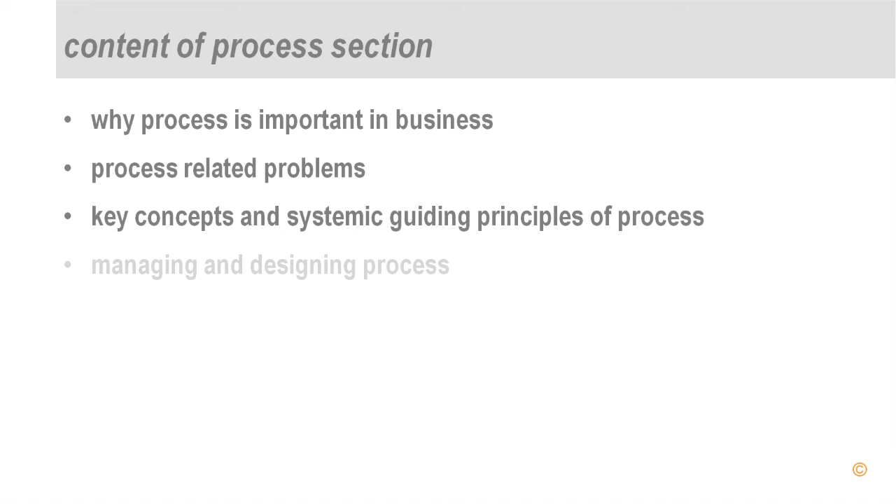In this section, we are looking at process in more detail. The content of the process section is the following: we are going to discuss why process is important in business and what some of the process-related problems are. We provide the key concepts and systemic guiding principles of process, and also how to manage and design process.

Why is process important in business? Global markets are increasingly efficient. To be competitive, organizations need to manage process.

They need to manage efficient process flow in all their activities, especially in their business processes. They need to continuously improve the processing and the output.

They need to develop their integration into the supply chain, in other words, upstream and downstream development, making alliances within the supply chain to increase efficiencies along the whole supply chain.

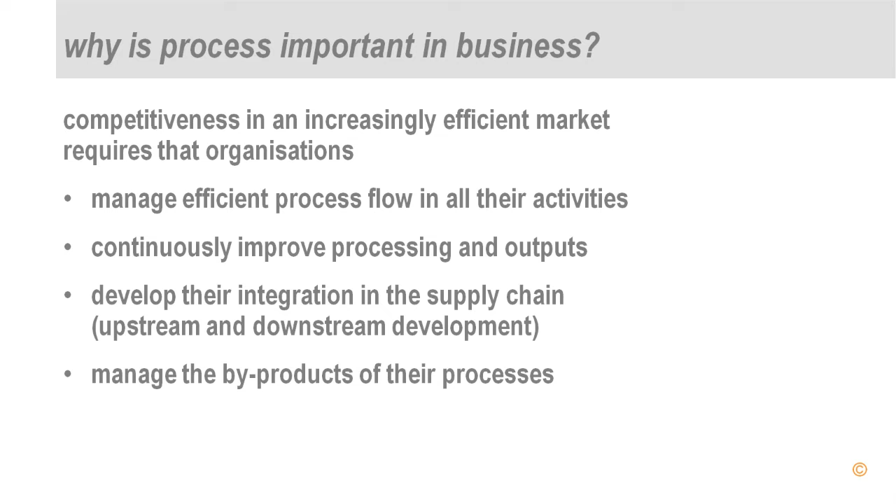They need to manage the byproducts of their processes that is sometimes overlooked, that byproducts like pollutants, for example, become increasingly important.

The impact on the planetary systems will become increasingly important and laid at the door of business.

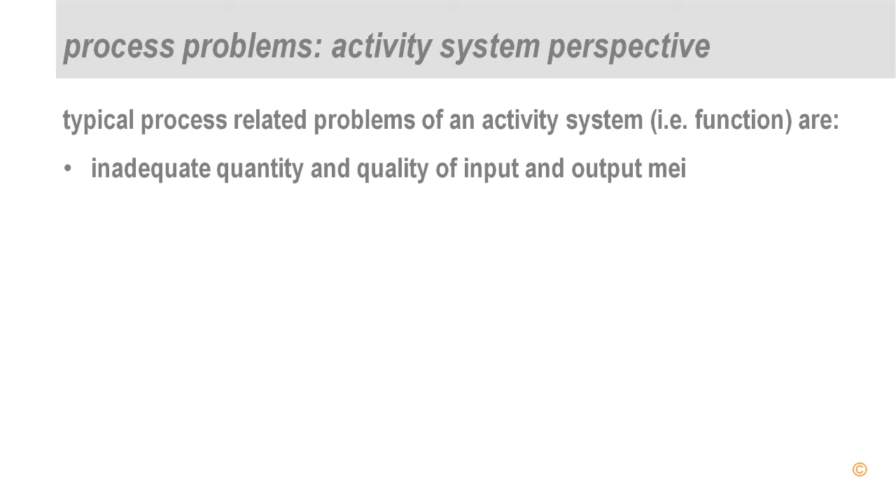Some of the typical process-related problems in an activity system or function are that there is inadequate quantity and quality of input and output, MEI. This could be defective supply and outputs, or over and under supply of outputs and inputs.

Then another problem is inappropriate MEI flow. It could be too fast, too slow, too long, too short distances and so on, causing delays, blockages in processing, deliveries, or over-under supply, or mistakes, faults, waste, amongst others.

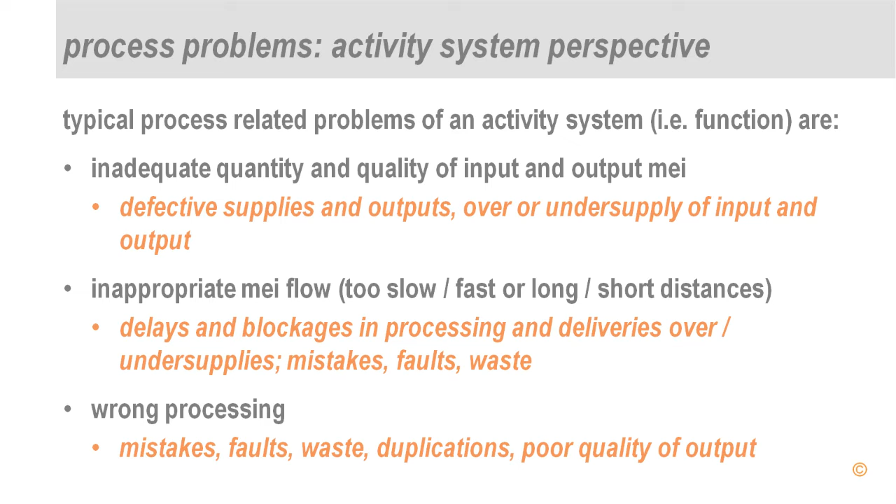And then there could be wrong processing, the wrong choice of processing methodology, or faults in processing, mistakes, duplications, poor quality of output, and the like.

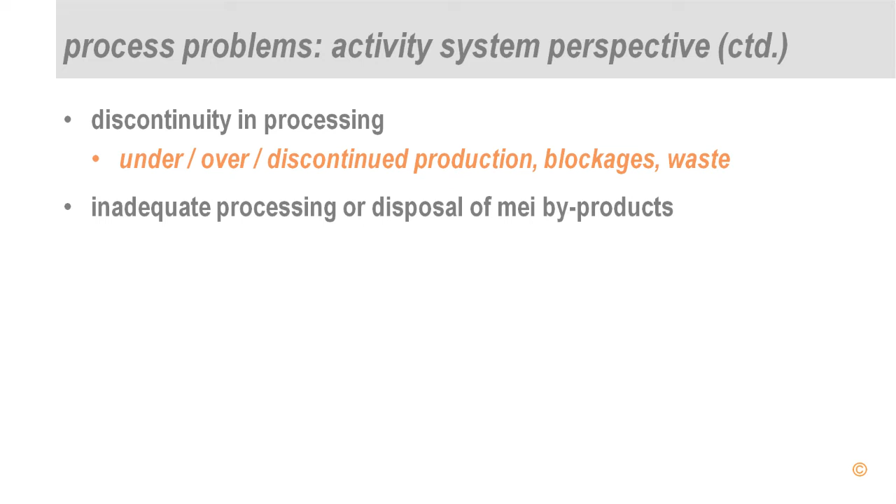Other problems are discontinuities in processing: over, under, discontinued production, blockages, waste, and so on, and inadequate processing and disposal of MEI byproducts. In other words, pollutions, accumulation of toxins, health or safety hazards, amongst others.

The process-related problems within an entity system: first of all, disorganized MEI flow within any of the activity systems of the entity system, which is part of what needs to be considered in any kind of activity system or function redesign.

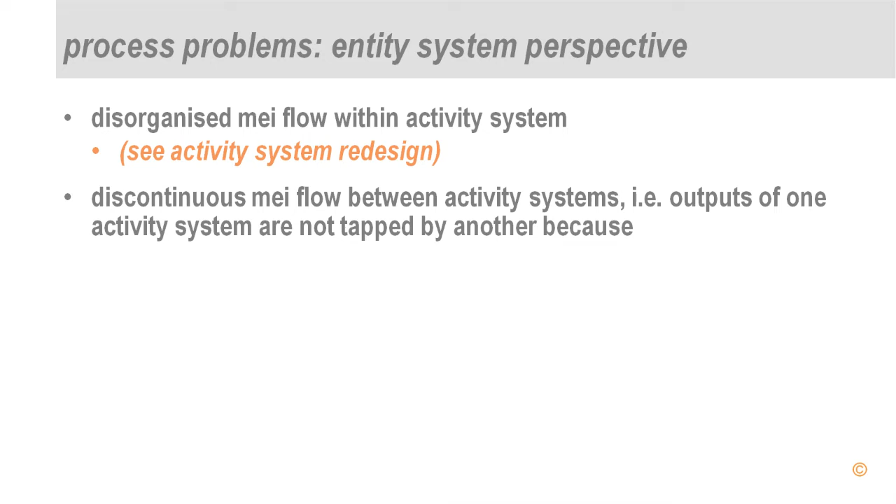Then a process issue is the discontinuous MEI flow between the activity systems of an entity. In other words, the output of one activity system is not tapped by another activity system because the outputs do not meet the requirements.

Or availability is not known, or there are byproducts like pollutants, chaos, confusion, or free radicals in physical systems, which are ignored or not processed and clog up systems within the entity system.

These byproducts are ignored or not processed and clog up systems within the entity system.

And there could be insufficient or faulty MEI flow between the output of an activity system, in that it is not what the other activity system needs, or that MEI is in short supply between different parts of the activity system. So activity systems of the entity compete for the same resources.

That happens very often, that the same labor would be required in different functions of an organization, or that budgets are allocated differently between different activity systems of the entity system.

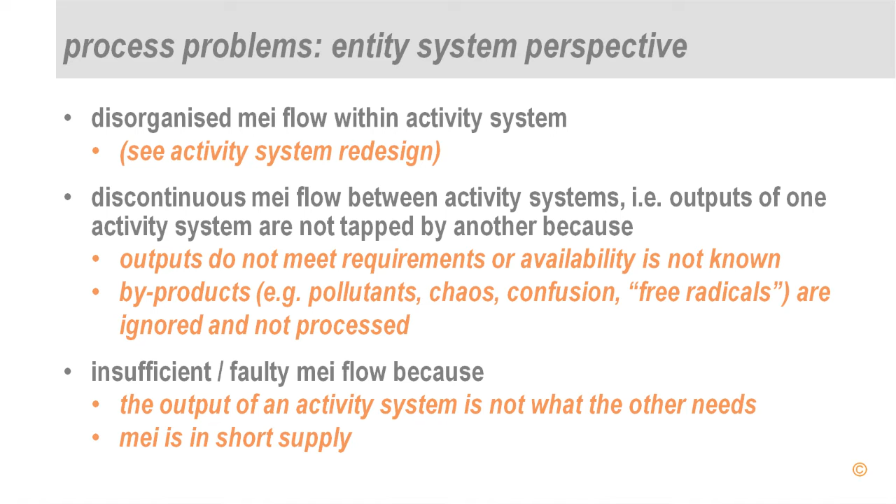And another problem could be that delivery of required MEI is not in time, it's too late or too early, or doesn't happen at all.

This section deals with key concepts and systemic guiding principles of process.

Let us look at the definition of process. A process is defined as a flow of substance in space and time. For example, if we observe a substance like water flowing in a riverbed, we refer to this as process. Or if we observe a substance like different parts being assembled into a car, for example, then we would call this a production process.

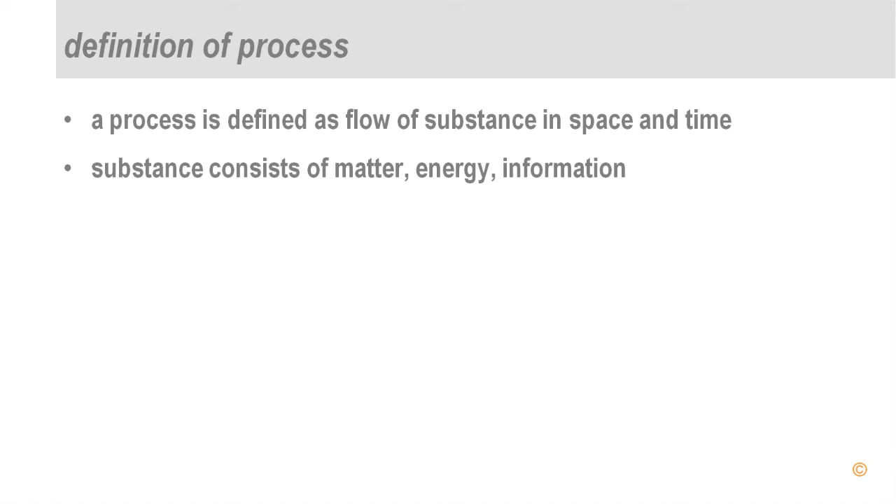Substance is one of the 7 forces of system organization that we will discuss later. We have defined substance as consisting of matter, material things, energy and information. We also say that these matter, energy, information always occur together and form a field of matter, energy, information, and that these MEI fields are what substance is about.

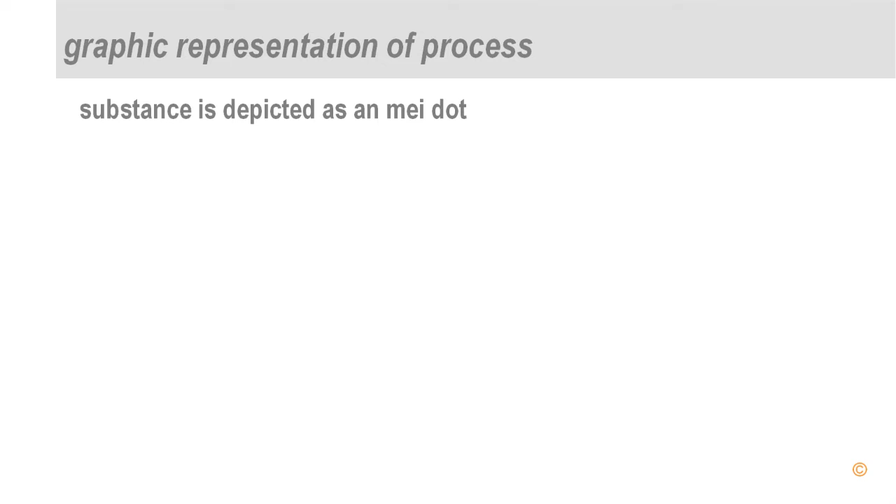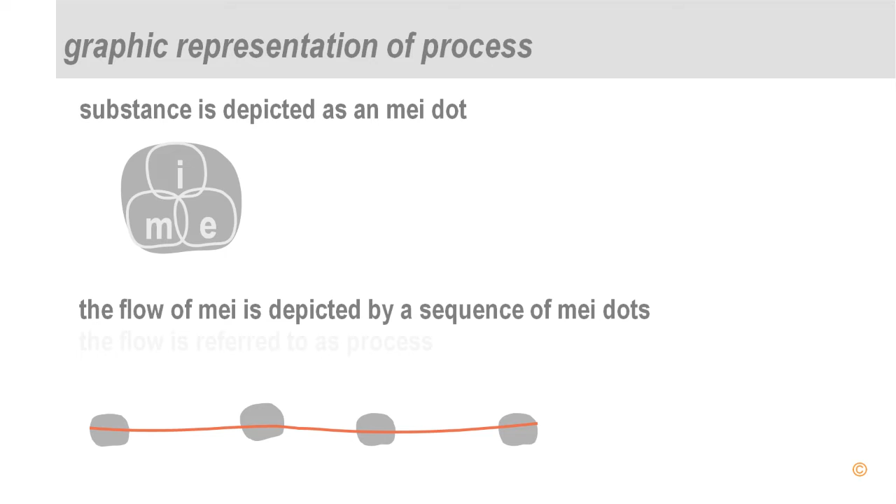The graphic depiction of substance is an MEI dot, a gray shape like that, which consists of matter, energy, information interacting. So as soon as we have a flow of these MEI dots, we have process. Substance flows, and the flow is represented by the orange line, and the flow is what we refer to as process. We need to distinguish between process and process system.

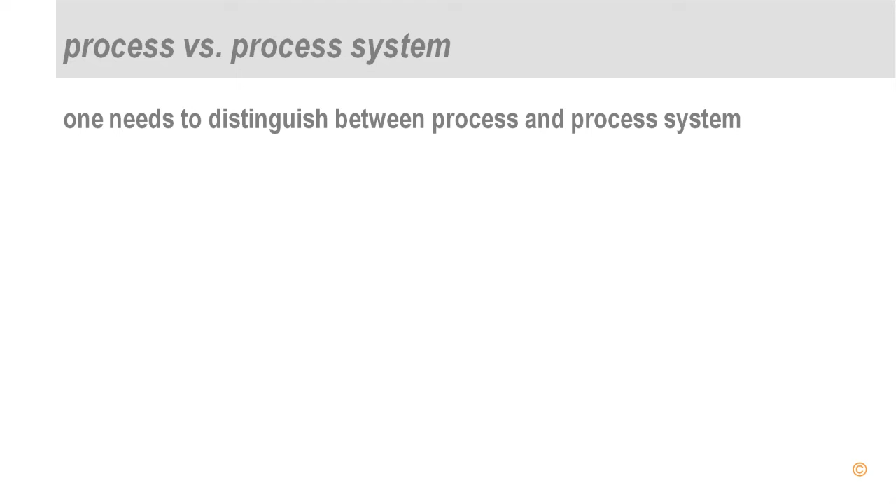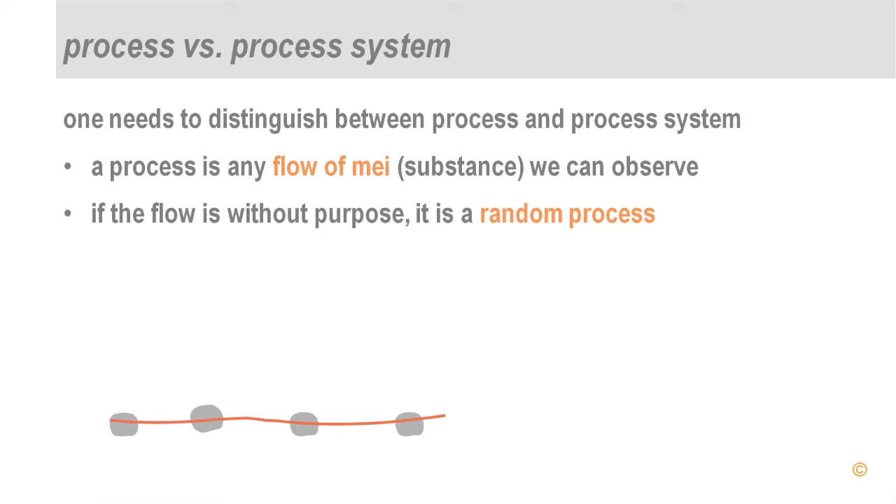If we are talking about a flow of MEI that we can observe, we call it a process. If this process is without a purpose, it is a random process, like a book falling off the table or an accident would be a random process. However, if the process is purposeful, we denote that by the arrows we have discussed in the previous section.

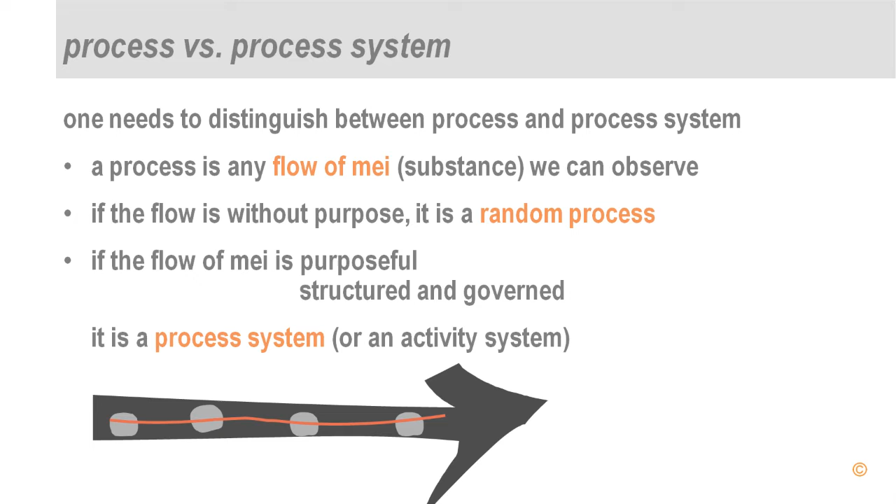And if this flow of MEI is structured and governed, then we have a process system or activity system. In other words, our flow of dots is organized, and that is called an activity system, depicted by an arrow. The arrow depicts organized process. When we hear the word process in management, like for example business process, then we typically refer to a process system or activity system, not a random process. One would use the word random to denote those.

What are some of the systemic guiding principles of process? The first guiding principle is that during processing, the MEI input gets transformed into an MEI output. So for example, if we have a process system like cake baking, the ingredients like butter, sugar, milk, eggs, etc. get transformed into the MEI output, which is our cake.

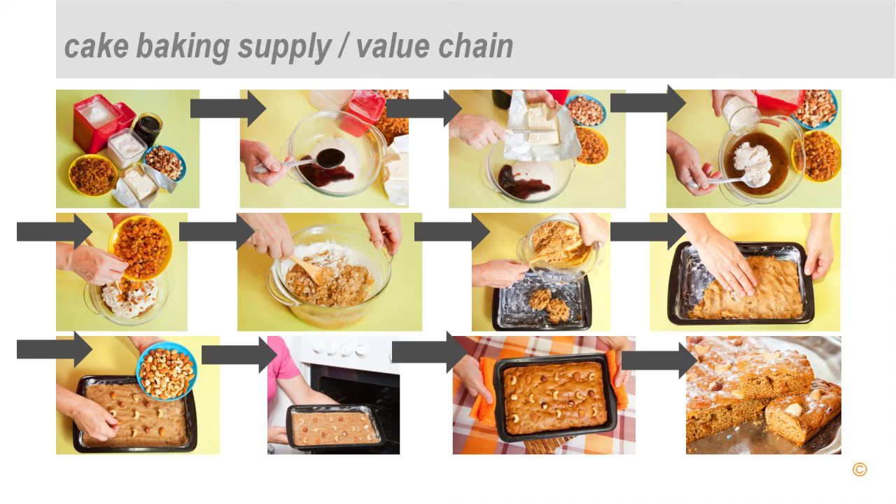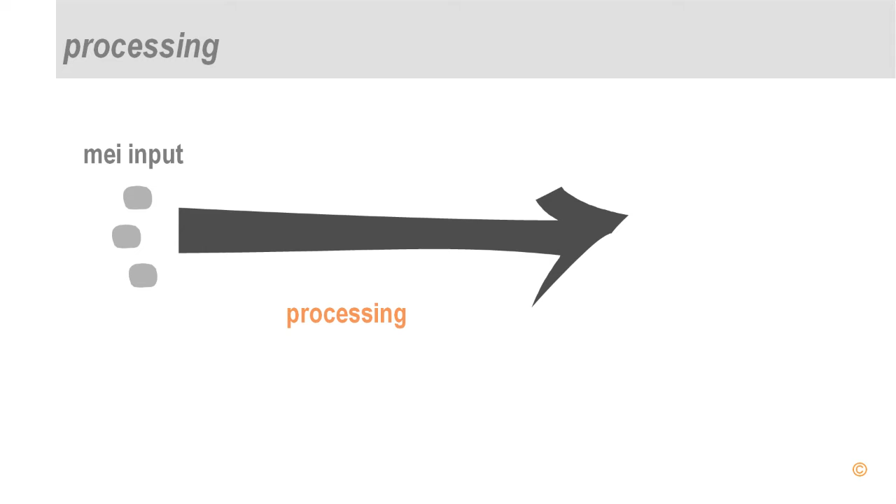So the graphic depiction of the process is we have the MEI dots as an input on the left, and we have the processing taking place in our system from one step to another. So in the cake, it would be we are assembling the ingredients, we are mixing them, we are pouring them into a cake tin, put them in the oven for baking, and so on. And it gives us the MEI output, which is the cake.

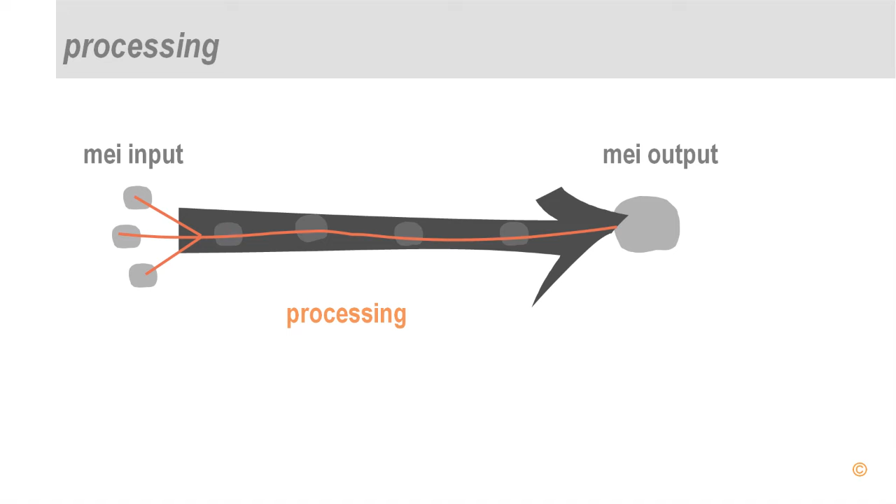The processing MEI, while it is being processed, the dough, the half-finished cake, etc., is also referred to as MEI throughput. The processing or acting on the input substance transforms it and adds value. If we take the example of the cake again, as we take the ingredients and start mixing them, in other words processing them or acting on them, they change their shape, they become smooth, foamy, and have value added that wasn't there before, because as we put the ingredients in, they were separated, and the processing mixes it and creates new value.

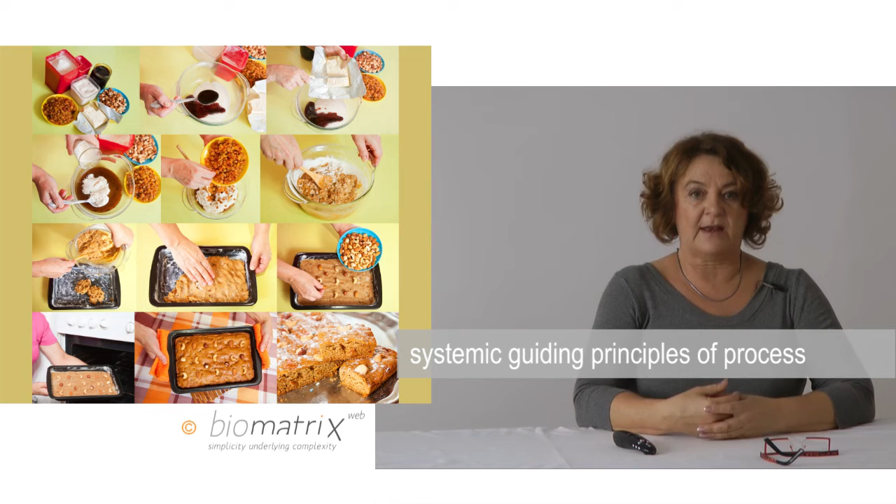As we put the dough into the oven, it acts through heat on the dough and adds value. It transforms the substance, adds value, and we have the cake that we can eat.

The output is greater, more, or different than the sum of its inputs. We have learned before that the essence of system theory is emergence, new quality that arises in the interaction of systems, and we have the same again in the process. We have learned the famous systems saying that the whole is greater, more, or different than the sum of its parts. So in the context of a process, the output, the whole that comes out of the processing line, is more, greater, or different than the sum of the ingredients that we have put into the processing.

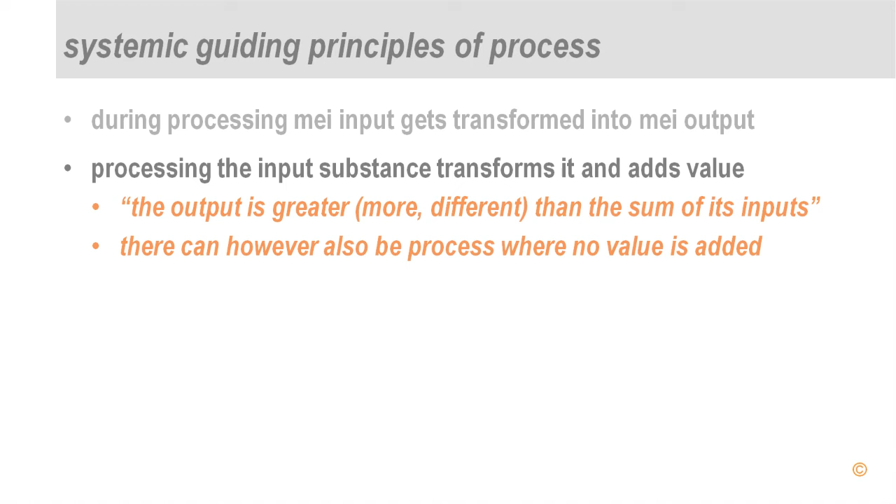We can have, however, also a process where no value is added. Now, in business, when we do business process redesign, one of the issues we are looking at is, does this process add value? If not, we tend to cut it out. So typically pushing a piece of paper from one side to another doesn't really add value most of the time, so it is one of those processes which we find unnecessary and want to cut out.

So business process redesign is really about identifying which processes add value and which don't, and reducing those which don't. Each transformation that happens of matter-energy-information marks a processing phase.

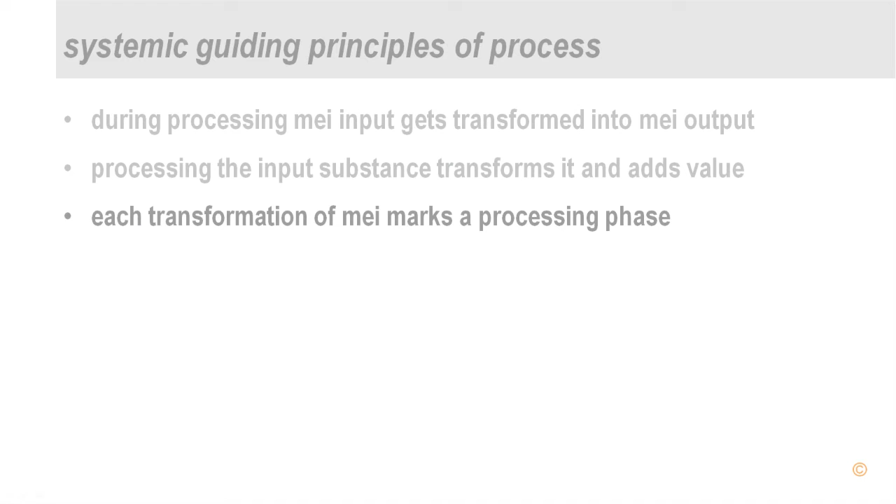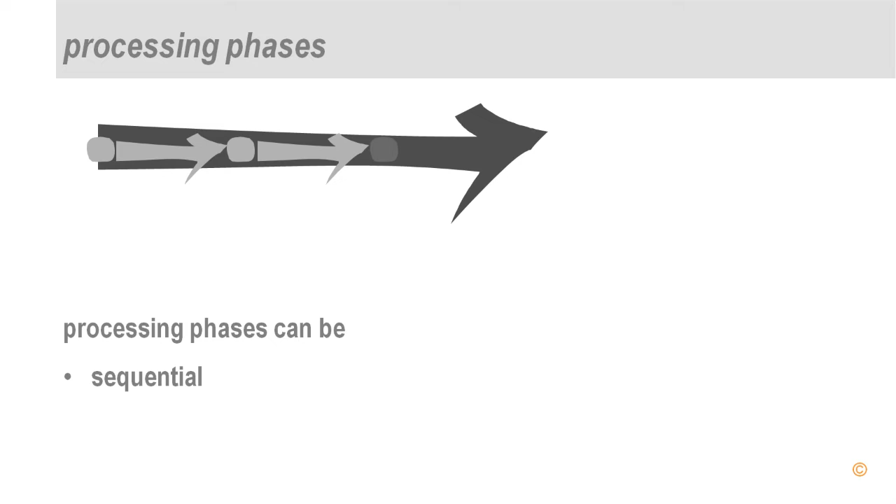So for example, as I assemble the ingredients, I have one phase. As I start mixing them, I have another phase, etc., and the MEI gets transformed in the process of it. This processing can occur in sequential or in parallel phases. Sequential processing occurs one after the other. I first have to unwrap the butter from the butter paper and put it in the pan before I can mix it with the egg, and before I put the egg in, I have to get it out of the eggshell, etc. So there are sequences involved: the assembly of ingredients, the mixing, the pouring, the baking, the glazing. I have to do them one after the other.

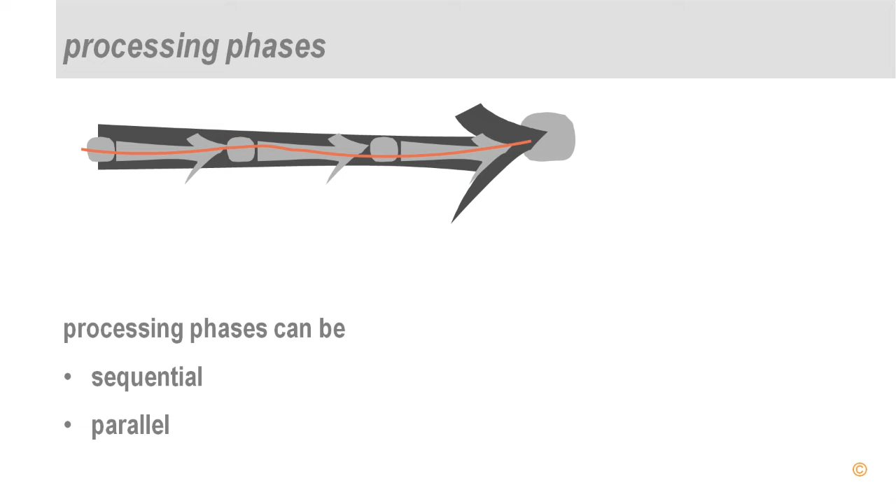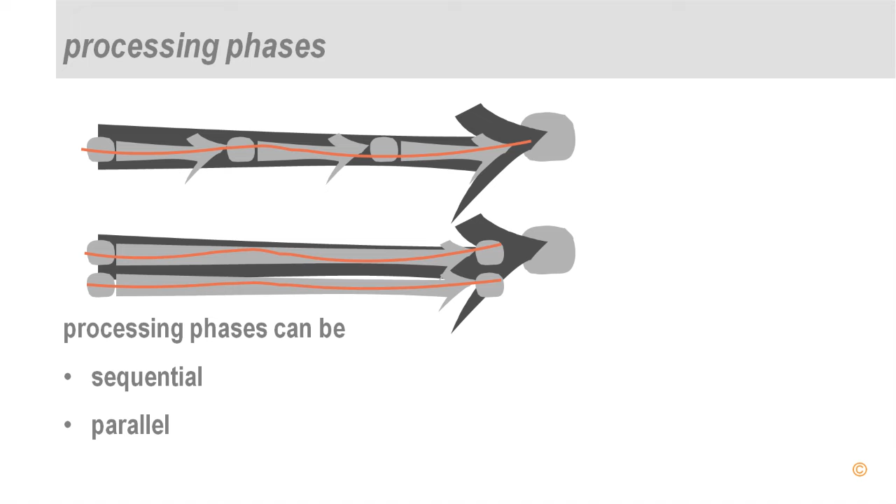This is called sequential. At the same time, we could also have parallel processing going on. For argument's sake, I could preheat the oven while I am mixing the ingredients, so that the temperature is correct when I put the cake in the oven. All process redesign is no more complex than a combination of the parallel and sequential processing phases, except that sometimes there can be very many, creating an apparent complexity with feedback loops, etc.

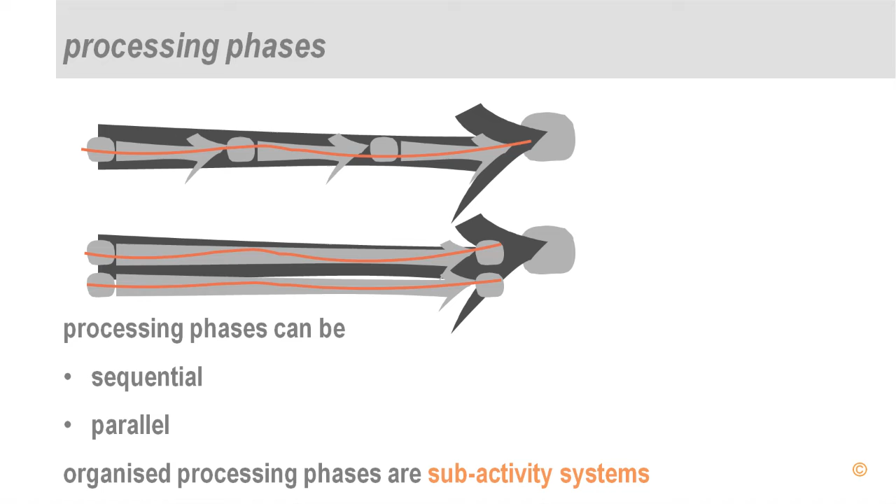In an organizational context, we call the processing phases also sub-activity systems. In other words, if the processing phases are purposeful, structured, and governed to achieve their aim, which is a sub-aim of the overarching aim, then we call them sub-activity systems, and they can be parallel or sequential.

During processing, the MEI flows split up and are recombined into products and byproducts. So if we go back to our cake baking example, the products at each phase would be the assembly of the ingredients as the first dot, the dough of a particular consistency or quality as the second dot, baking it as the third dot, and the final cake as the fourth dot.

At each phase, we also have byproducts being produced. Once I'm assembling my ingredients, part of the ingredients go into the mixing bowl, the other part goes into the rubbish bin. Once I pour the mixing bowl into the baking tray, some of the dough stays behind and will be washed away with the dishwashing. While I'm baking it, some of the byproducts will be that the kitchen is heating up.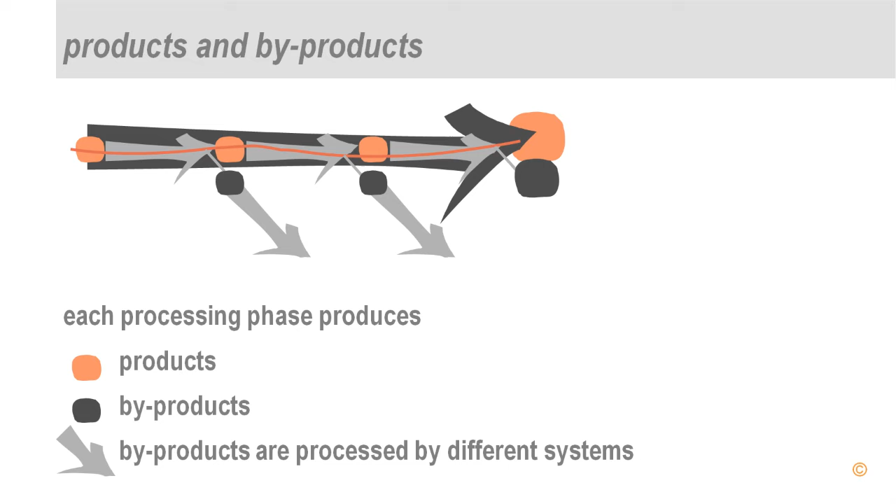So at each phase we do have products and byproducts, and there are different activity systems or process systems that deal with those byproducts. The rubbish goes into the municipal rubbish dump where it is being sorted, composted, etc. The dough in the bowl goes into the sewage system. The heat of the kitchen is radiated into the kitchen.

So there are various activity systems that deal with those, and it will be increasingly important for organizations to manage not only their products but also their byproducts, the impact on the planet.

One of the reasons why we have challenges such as climate change, polluted water, soil, etc., is that we have given our byproducts to the planet, and the absorption capacity of the planet to deal with those has been exceeded. So we need to actively manage those to get planetary systems back into equilibrium, because if we overload their absorption capacity, whole ecological systems can go into disarray, as we observe through climate change.

And increasingly, it will be legally enforced for organizations in future to deal with their byproducts.

Another way of looking at byproducts is how Buckminster Fuller talks about it. He said byproducts are merely resources we haven't tapped yet. We haven't looked at those systems and made them profitable, or linked businesses to them. We have done it with some, making electricity from municipal rubbish dumps, for example. There must be many more such opportunities.

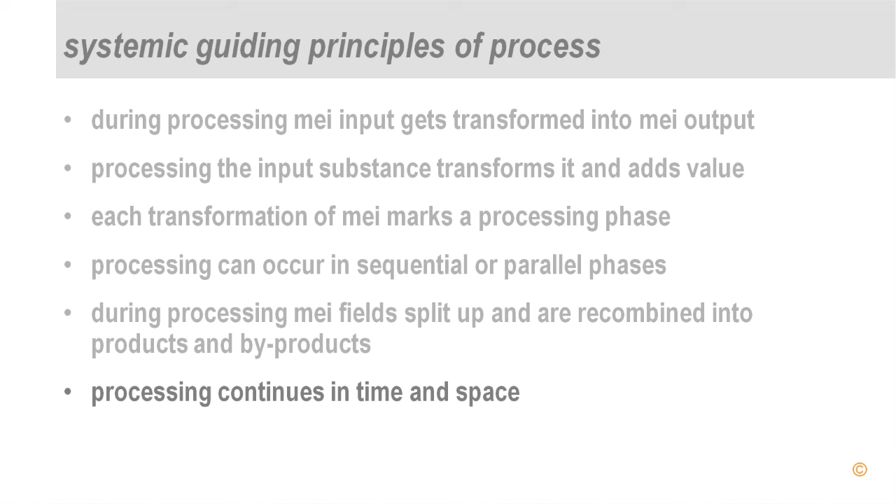Processes continue in time and space. That is another important principle. It is the MEI that continues in time and space, and it continues through tapping of MEI.

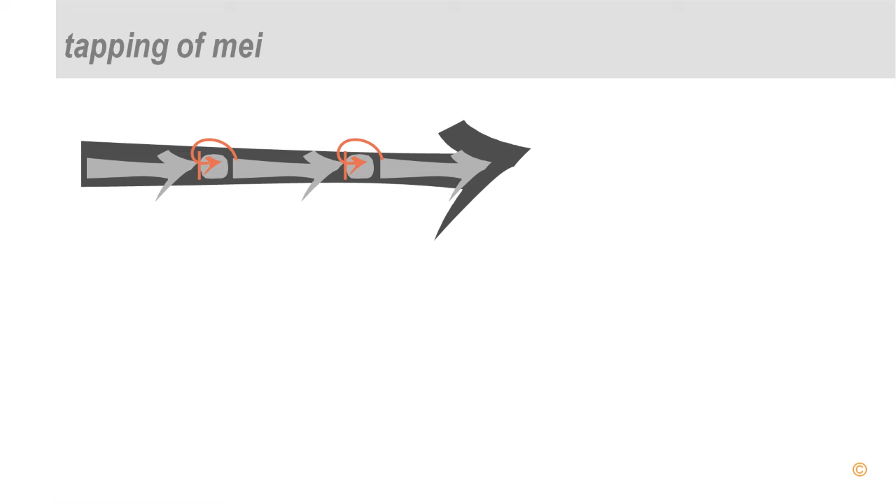If you look at that graphically, we have our process system with different phases. The first phase produces an output, for example, part of a machine, which needs to be tapped by the next phase as input to produce the finished product, a finished machine, which is being tapped by the next phase, which could be a warehouse, and so on. So the output of one phase is tapped as input by the next phase, being transformed in processing, and then again tapped by the next phase.

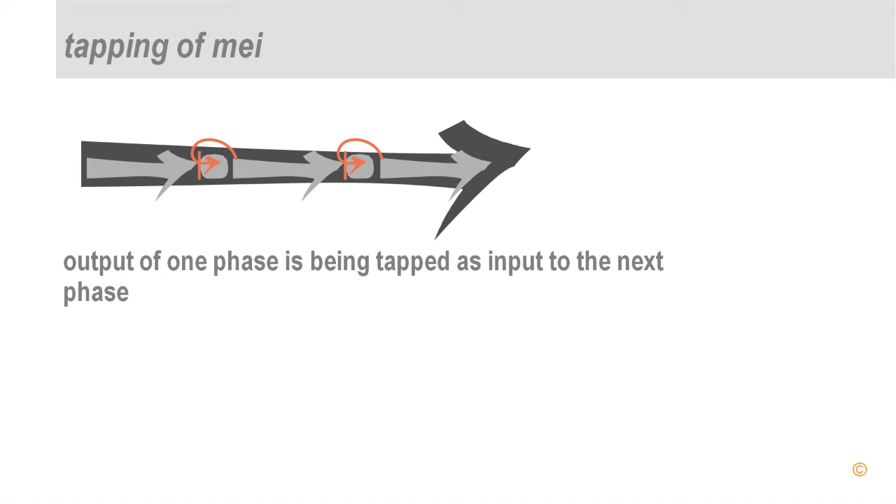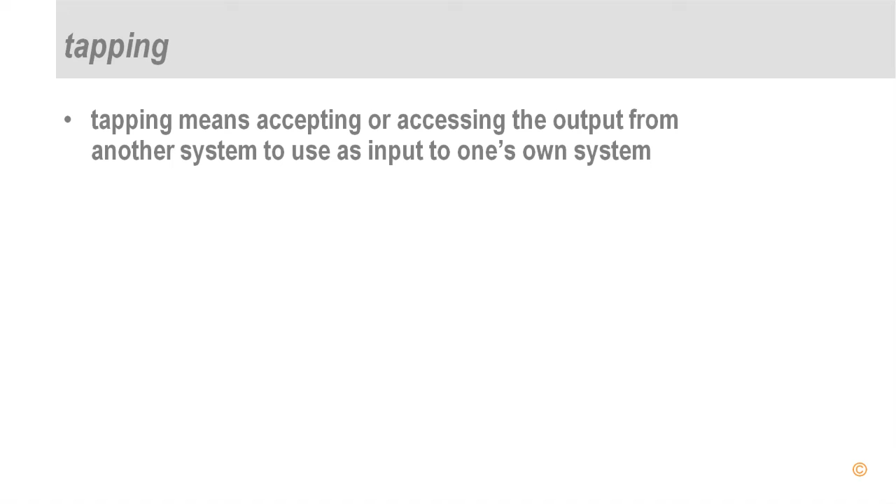Tapping really means accepting or accessing the output from another system to use as an input to one's own system. Tapping can be passive or active.

Passive tapping means allowing MEI to continue. If we look at the cake tin, for argument's sake, the cake tin taps the dough passively as I pour it in - it just allows it to happen. If you're watching this video and not really actively participating, just allowing it to wash over you, then you tap passively. You have various filters that allow certain information to go in and other information is filtered out.

By comparison, active tapping means we are seeking out information. You would have done active tapping when you pressed start on the video - you wanted to see it, you made an effort to actually tap information.

If you go into a library or go into a search, you are going to an even greater effort to seek out specific information. So tapping can have a range of modes between passive and active.

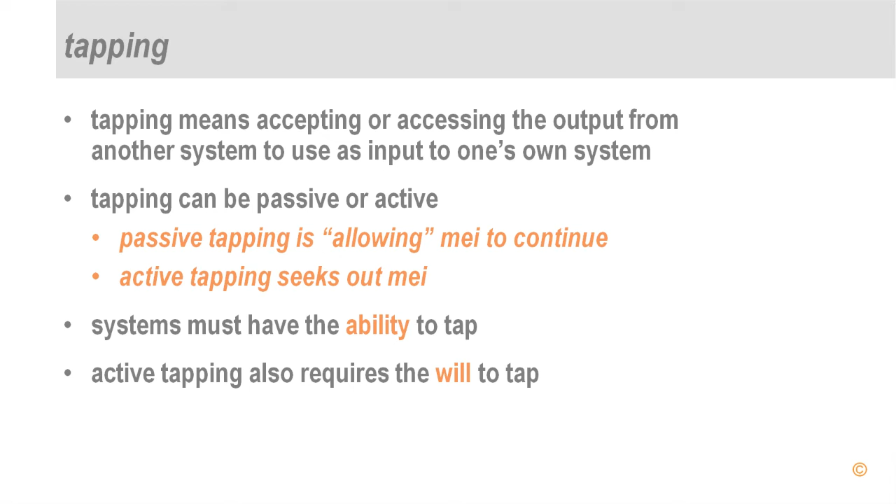Active tapping, moreover, requires a deliberate will to tap. Before I go out to actively access something, I must have the will to do so. In other words, in many tapping situations we need both the ability and the will. A child in education, for example, may have the ability to tap, but not the motivation or the will to tap - then tapping or learning will not take place. Or there may be the will, but not the ability.

If MEI flows across system boundaries, we speak of external supply chains. If they occur inside the organization, they're internal supply chains.

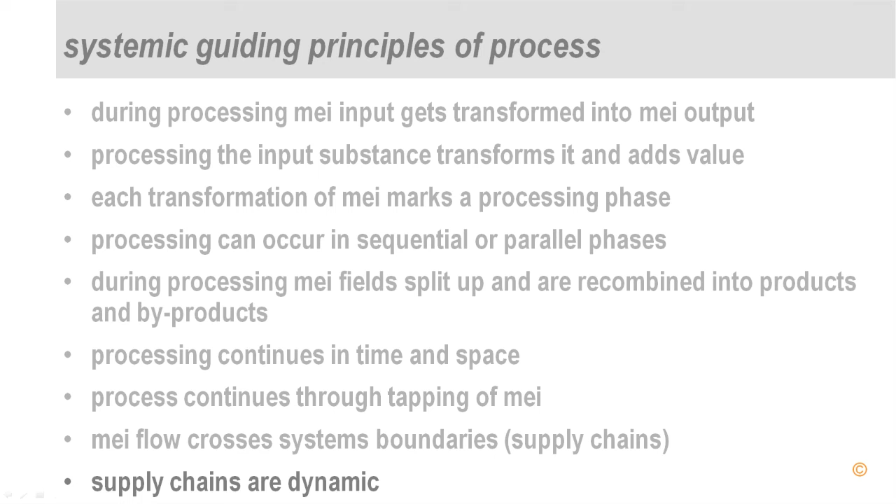Supply chains are dynamic. What we mean by that is that in a supply chain, matter, energy, information, or the products flow one direction, while the information flows back in the reverse direction.

For example, a car manufacturer who wants to know how many cars it needs to produce needs information about the likely future demand, and that information flows from the potential customer to the retailer, to the wholesaler, to the organization, while the actually produced cars flow from the supplier, manufacturer, to the wholesaler, to the retailer, to the final customer. In this flow of products versus the information flow which goes the other way, there can be time delays. This can make supply chains very dynamic and counterintuitive for managing.

It can create a situation where, when there's little demand, I have to actually increase production to accommodate the demand at a later point in time.

An example of a supply chain from the fruit juice industry: the first phase is growing fruit, done by the farmers. The second phase is the pulping, typically done by a different company. The third phase is mixing the juices. The fourth phase is transporting it to the market, into the shops.

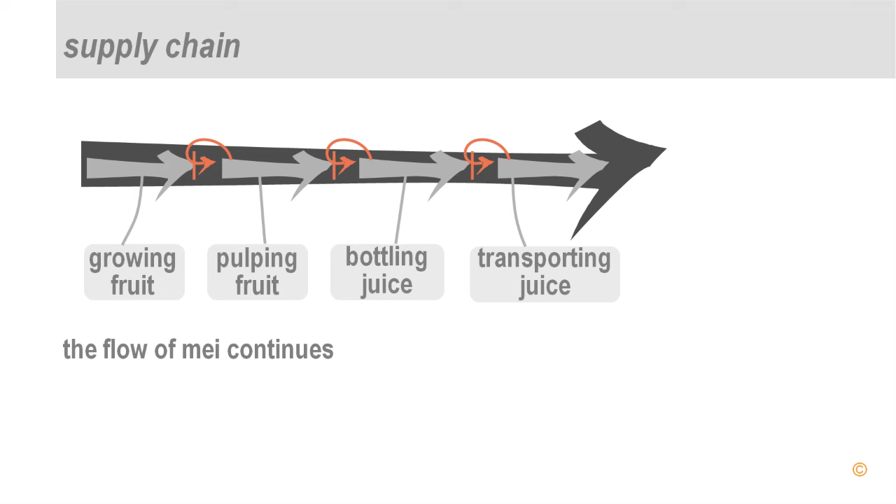The output of one system is tapped as an input by the next system, etc. If tapping doesn't take place, then there is no continuity of matter, energy, information along the intended supply chain. But as we heard earlier, MEI continues - this is a systemic principle.

So the outputs would then continue in a different direction. It could be that the farmers produce too much fruit that can't be tapped by the other industries, so it may have to end up on the compost heap - a different system taps it. But there will always be systems that tap MEI.

Processing, the transformation flow of MEI, has some generic guiding values. One of them is effectiveness. This means that the right value is created during processing - the right MEI transformation is taking place in terms of the overarching aim of the activity system.

Another guiding value is efficiency. This refers to the MEI flow in time and space, that it does not waste energies, that it is at the appropriate speed, not too slow, not too fast, that there's no waste of resources, etc.

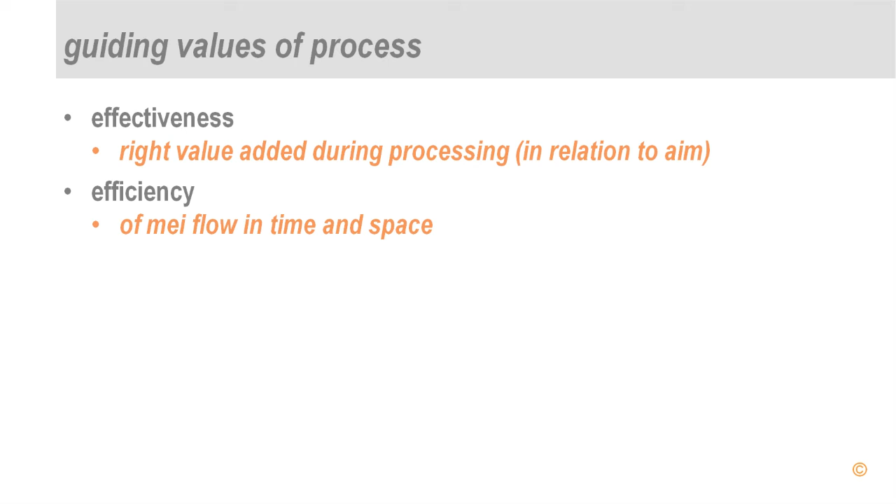Then there is continuity of the MEI from one sub-activity system to another, that the output of one activity system is tapped by the next activity system, and that there is no overproduction or undersupply along the way, or blockages or discontinuities.

Sustainability is another guiding value. We have to select processing MEI and also support and acting MEI that is within the limits of stakeholder systems, that does not deplete stakeholder systems or overburden them in terms of byproducts or negative impacts. So it must be sustainable.

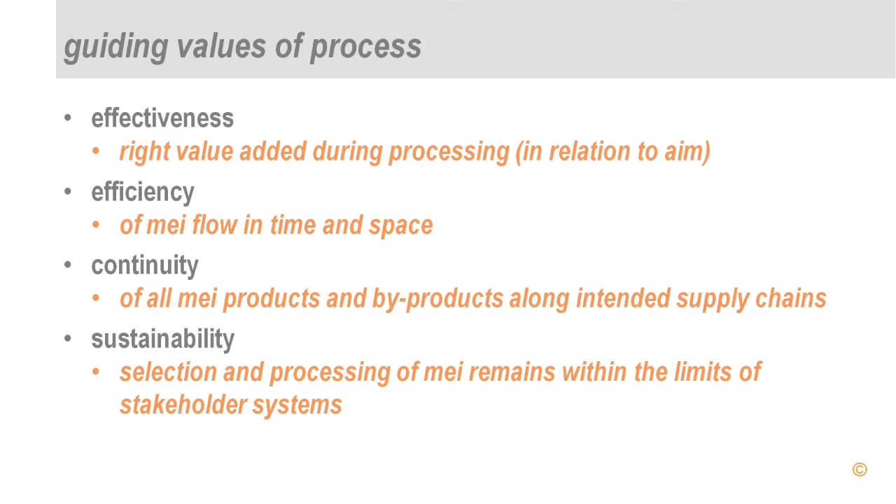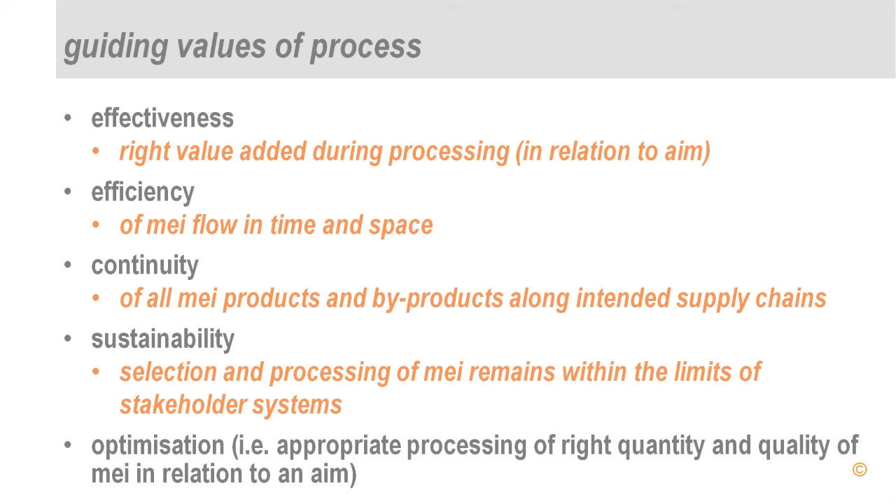Another guiding value is optimization. This refers to the appropriate mix and selection of processing method, ingredients, and acting and support MEI in relation to each other, so that the intended aim of the system is achieved.

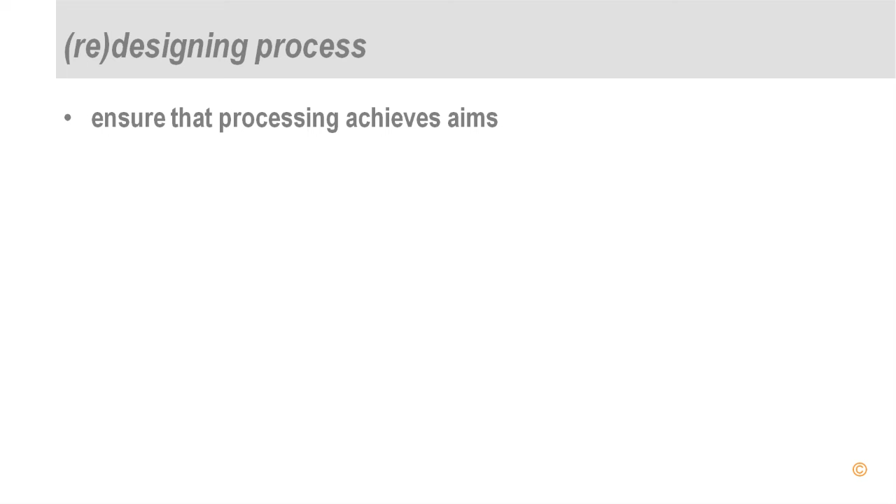This section deals with managing and designing process. To design or redesign a process involves the following: we need to ensure that processing is set up in such a way that the aim is being achieved. That first of all requires that we select the appropriate processing method overall.

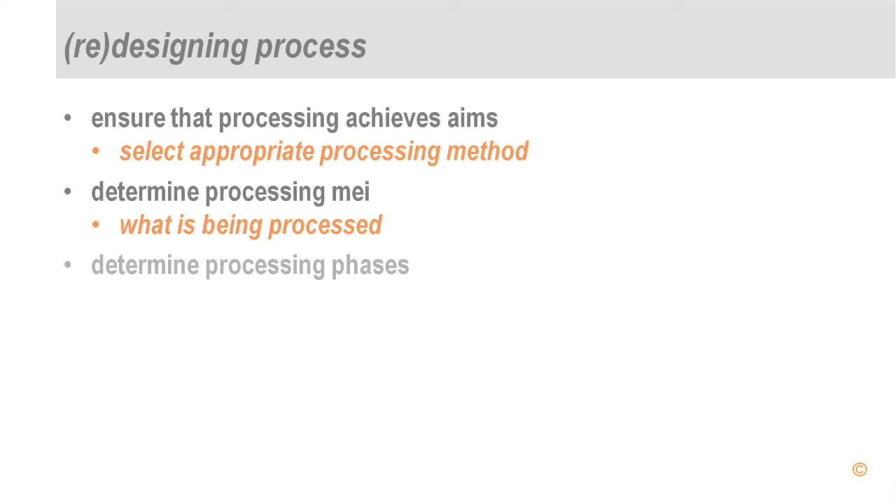Then we need to determine the according processing MEI - in other words, what is being processed, the material, energy or information. Then determine the processing phases. As we learned, each time there's a qualitative change occurring in processing, this marks a phase. We need to determine the sequential as well as the parallel phases, and then we also consider tapping.

Between the different phases, there could be tapping involved of the processing MEI. We could look at what is the activity - for example, is tapping involving storage? And then what happens to the processing MEI during that tapping phase? Is the quality of the good that is being stored affected or not?

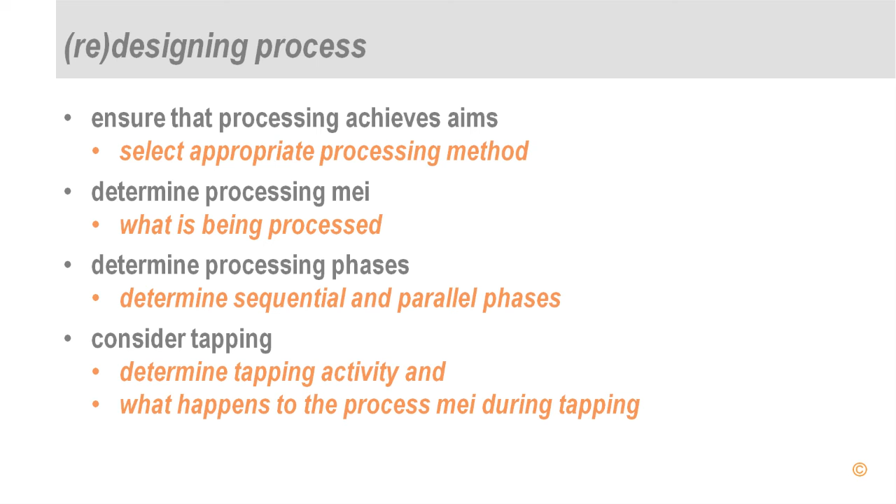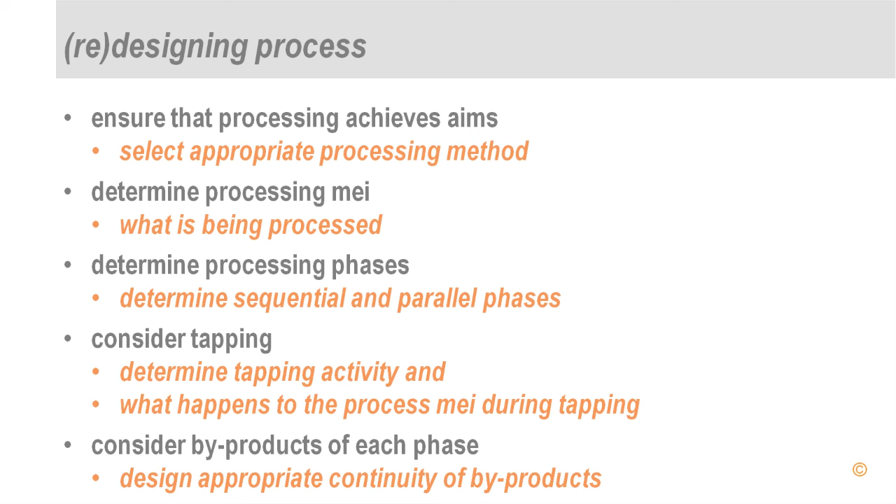When we redesign a process, we also need to consider the byproducts that are being created at each phase, and we need to design appropriate continuity of those byproducts. That could imply also designing different systems that are tapping the byproducts and processing them.

Let us now look at the principles for managing process. The first one is we want to optimize the flow of material, energy, information - we want an efficient MEI flow. So when we do just-in-time tapping of spare parts, we do it because of efficiency.

We also need the right quality of processing MEI. If we don't have the right ingredients or the right quality, we may have a process that is clumsy or that is not flowing easily.

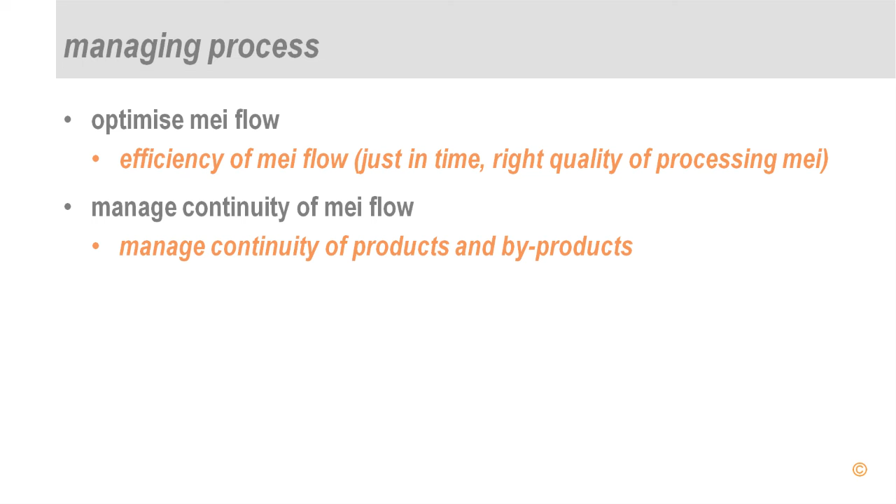We also need to manage continuity of MEI flow of both products and byproducts, as we have learned. We need to understand that our products are of a quality that can be tapped by the next system, and we need to make sure that the byproducts we produce are being tapped by appropriate systems designed to do so. Up and downstream development or supply chain management can help us with the continuity of MEI flow.

The more we have alliances with our suppliers upstream, and with our customers downstream, the more we align the specifications of the products that are taken up by us, produced by us, and taken up by the customer, the more smooth the flow of MEI will be.

It is also important to manage tapping. Tapping means accessing the output, like turning a tap on and off for water - if I turn it on, water pours out and I can tap it in a basin or whatever. This is what we mean by the word. All output needs to be tapped, taken up, accessed, bought, taken in, used - whatever words we want to use - by the next system.

One important principle around tapping is that the responsibility shifts with tapping. This is illustrated by the famous saying that I can lead the horse to the river, but the horse must drink. So one system leads the horse to the river, but if the horse doesn't want to drink, doesn't want to tap the water, there is a discontinuity of the supply chain.

I can offer you knowledge about systems thinking. I must do the best I can to make it accessible to you, understandable to you. But if you want to learn it, that is your responsibility.

Having said that, I also have to say that tapping can be mediated. In a face-to-face situation, when I see that I have talked about so many systems concepts and the eyes of my audience are glazing over, then I realize I seem to have overloaded them with information, and I can try to mediate so that understanding is taking place.

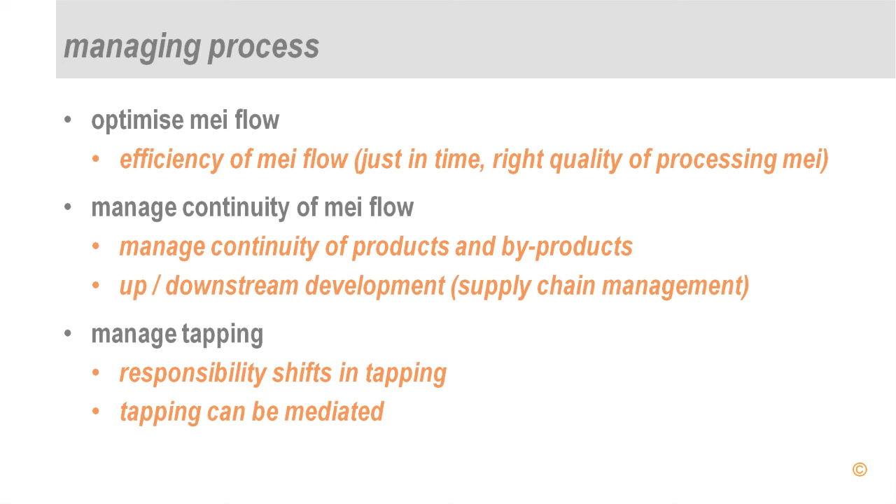I may give more case studies, I may explain again, I may ask questions. There are various methods of how I can mediate tapping. Many marketing techniques, advertising, promotions, are techniques that businesses use so that their clients, customers, tap the products that they have produced. Tapping can involve power games. If I go back to the horse and the river, I can illustrate that.

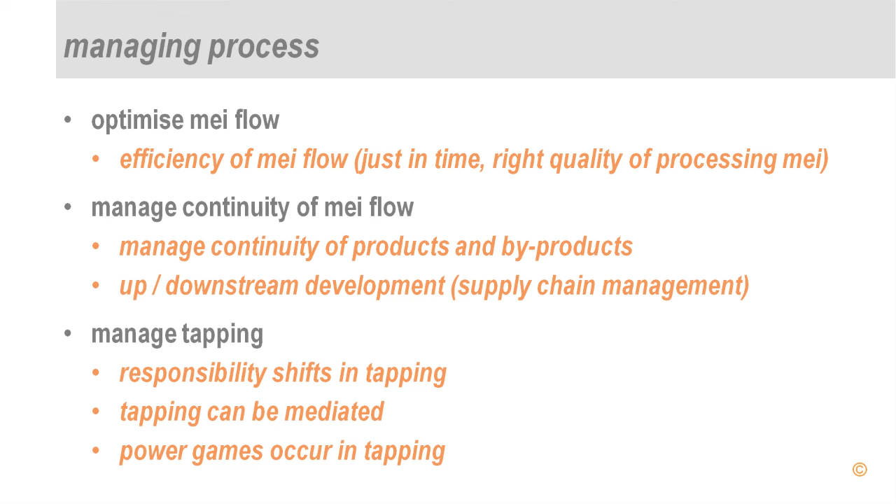If the horse doesn't want to drink, and I mediate now with niceness and say, dear little horse, look at the nice water, please drink, and the horse refuses to drink, I may employ a bit more power over mediation tactics. I may take the head of the horse and push it in the water. The horse doesn't want to drink. I may ask somebody to come and with a pail of water I open the mouth of the horse and we pour the water in. The horse still doesn't want to drink. The horse is free to choke to death. So the power over in tapping can become deadly for the following system.

So the power games are normally in tapping situations, in relationship situations, when one statement was intended, another one is being heard, to give another example. So there are very typical situations that arise in tapping. Tools for managing process.

To carefully select the correct MEI, in other words, to pay attention to procurement, both in terms of the right quantity, right quality, but also just in time delivery. Then it is important to select the right processing method, mediating the tapping of MEI. That means ensuring that the output of one phase is smoothly flowing into the following phase.

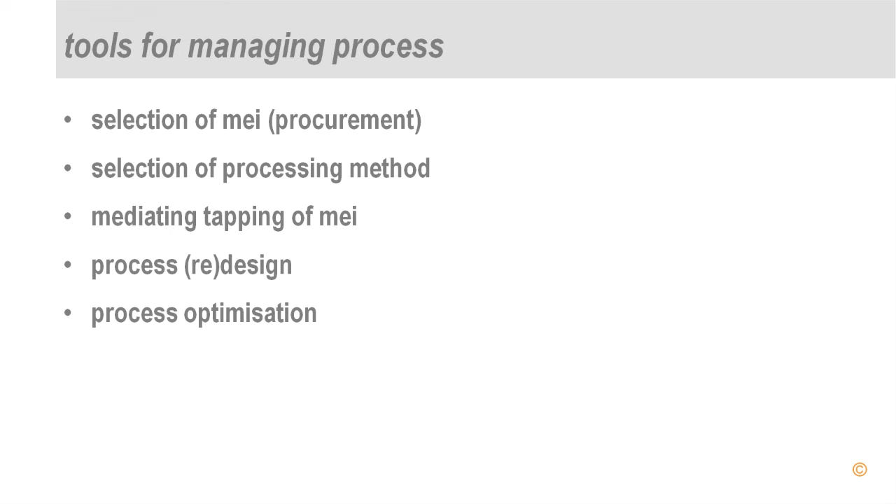Another tool usually used in processing is the optimization of process, that the least energy input achieves the aims. That could be least resources, least time, least cost, at particular levels of quality, etc. Those are balancing acts between the processing MEI and the acting and support MEI, as well as their configuration in time and space. Let us now look at the application of process in an activity and entity system.

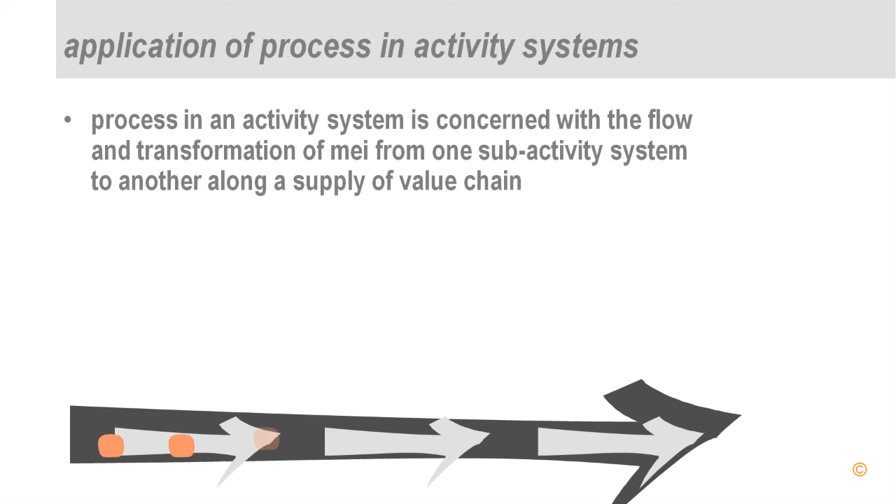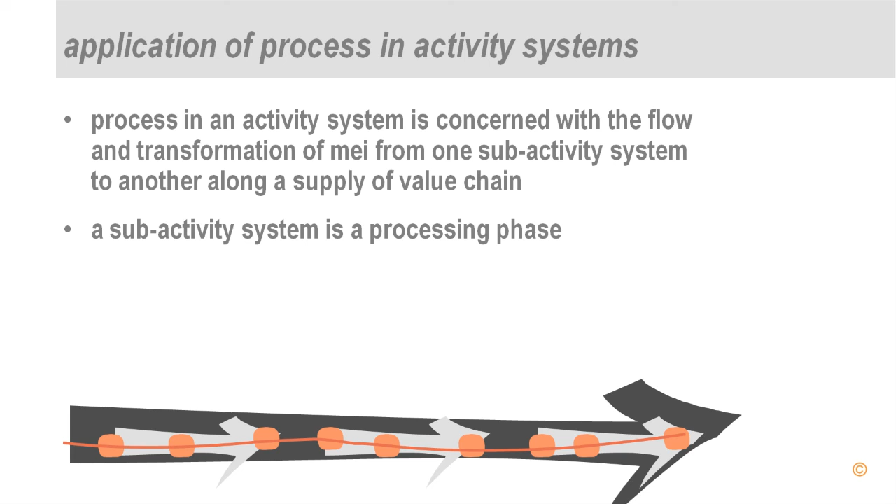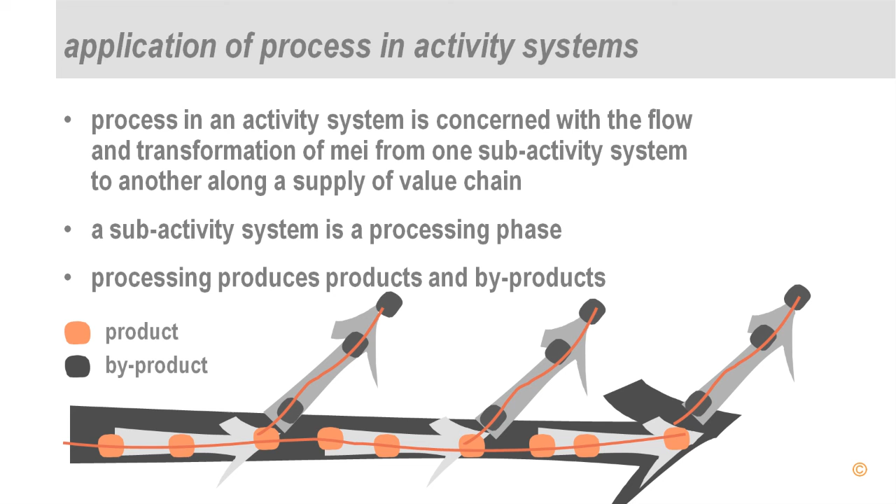Process in an activity system is concerned with the flow and transformation of matter-energy information from one sub-activity system to another along the whole supply chain. As we have learned previously, a sub-activity system is always a processing phase, whereby input MEI is processed and becomes output MEI. We have also learned that processing gives rise to products and byproducts, whereby products and byproducts move along different supply chains. In the context of sustainability, the byproducts are very often forgotten.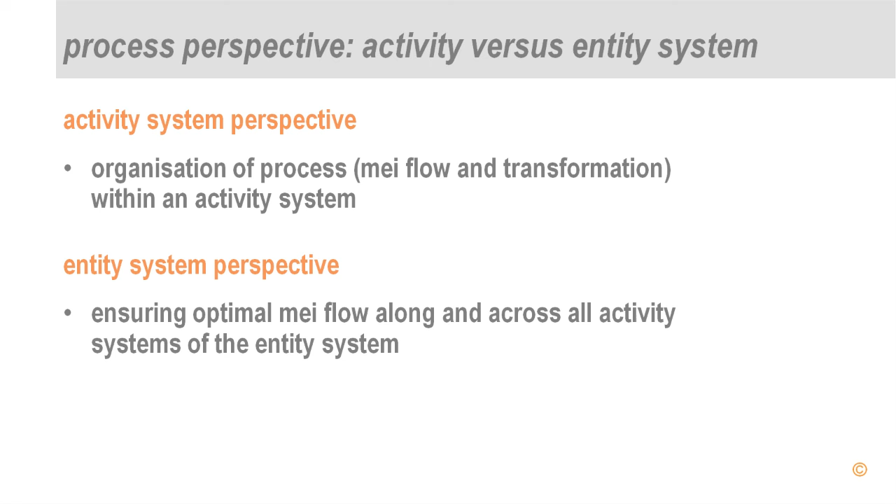The process perspective in an activity system deals with the organization of process, namely the MEI flow and the MEI transformation within the activity system. While the entity system perspective of process is about the optimal MEI flow along and across all activity systems within the entity system. The process perspective in an entity system is concerned with the flow of matter-energy information between the different activity systems of the entity.

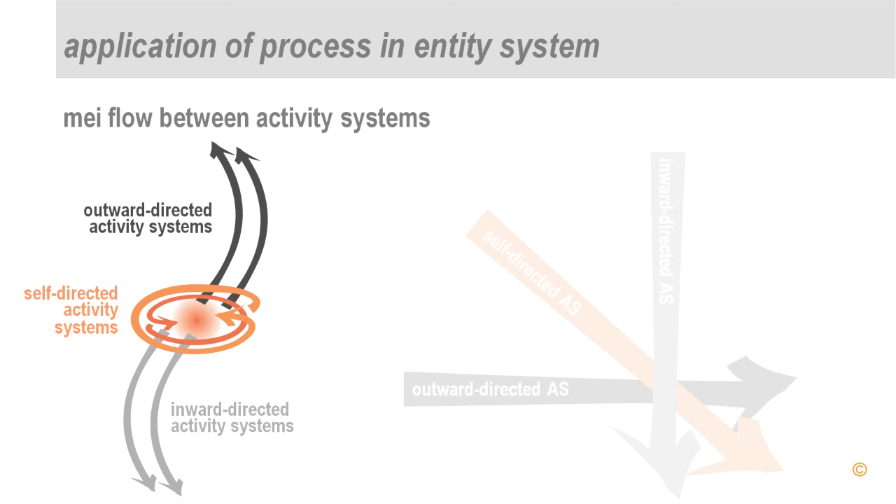This flow is facilitated by the structure of the system. In the context of an organization, we are talking about an organogram or organizational structure. How do we manage process within an entity system?

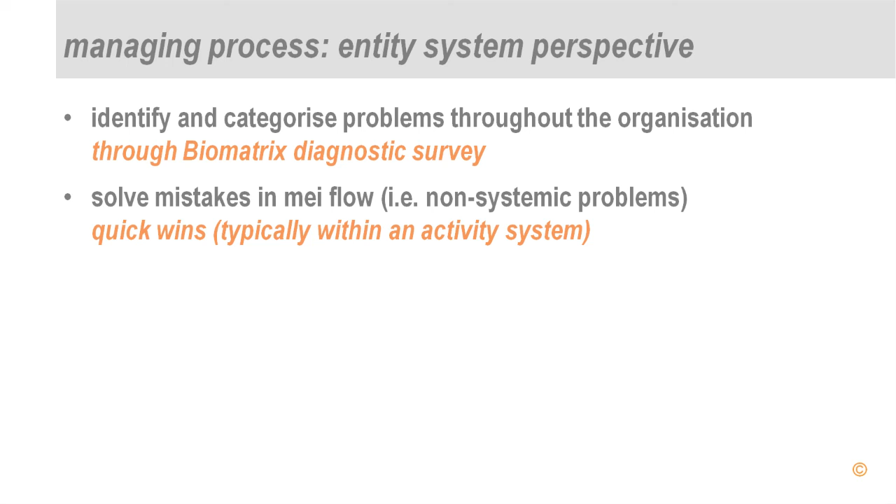Well, first of all, we need to identify and categorize the processing problems within the different functions or activity systems of the organization. We do that through the Biomatrix diagnostic survey. That survey automatically brings up all problems, including processing problems. Some of those processing problems can be solved because they are non-systemic, so they are maybe optimizing problems within an activity system or mistakes that can be corrected within an activity system. So those are non-systemic problems.

And then there are processing problems that emerge from the interaction of different activity systems that create MEI problems in different activity systems. These need to be dissolved through the redesign of MEI flow within activity systems. They need to be created in an orderly fashion according to the requirements of other activity systems. This requires order in both a functional and cross-functional flow along the activity system supply chains.